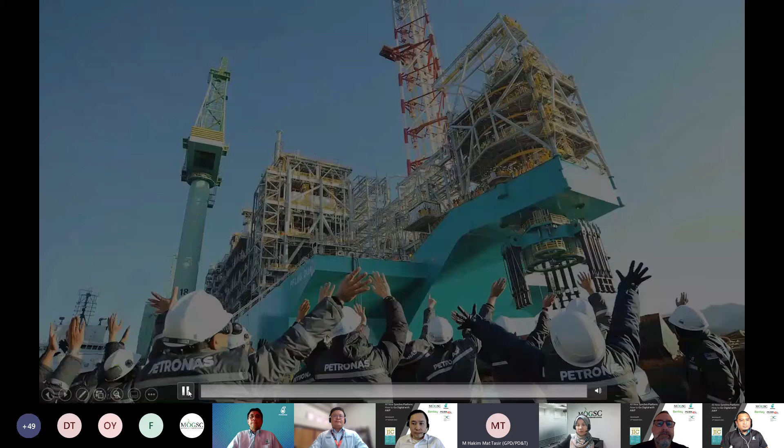WEF established the Shaping the Future of Construction project, about what the future of the industry will look like, and how best to prepare for it.

Current business models, strategies and capabilities of players in the infrastructure and urban development industry will not be sufficient for any of these future worlds. But there are 6 no-regret moves all infrastructure and urban development companies can take to prepare.

First, they must attract new talent and build up the required skills. Widening the sourcing of talent and improving the industry's image can help. The company should also provide more modern workplaces and opportunities for learning and development.

Second, infrastructure and urban development companies need to enable change management and adaptiveness. This requires agile working methods and flexible organizations.

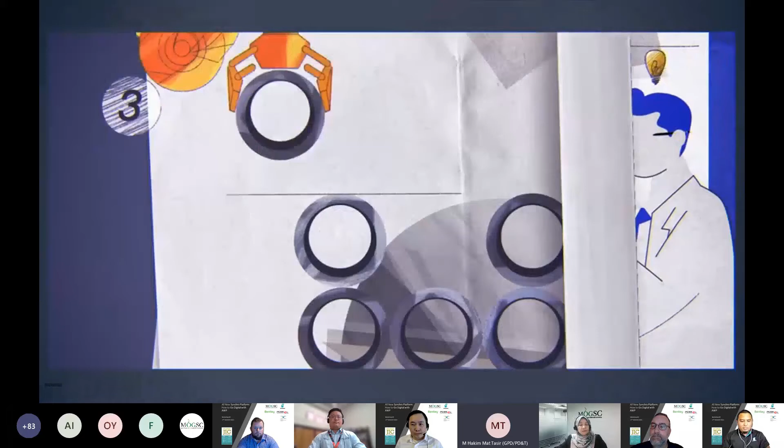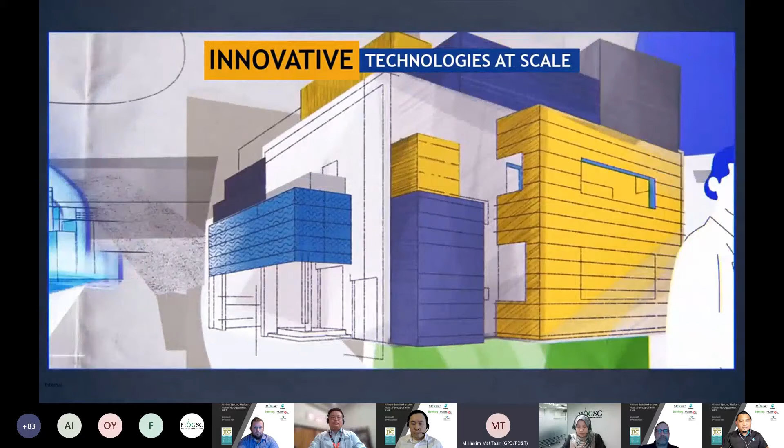Third, they need to implement digital models and data usage throughout their processes. Fourth, they must also adopt innovative technologies at scale. It's important to innovate in new ways and integrate new technologies.

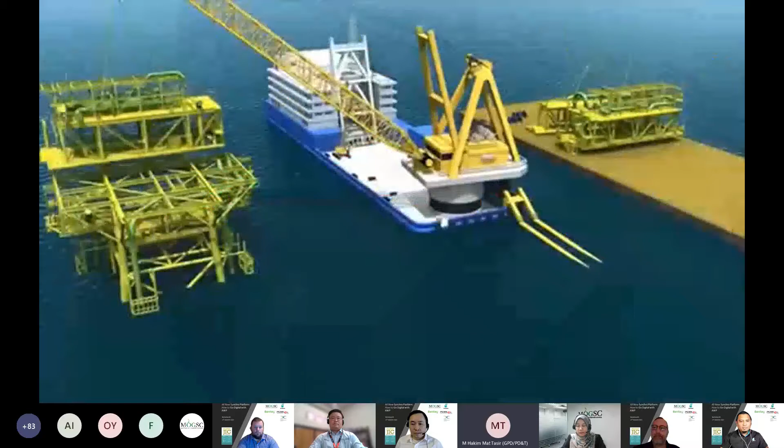Fifth, infrastructure and urban development companies need to increase integration and collaboration across the value chain. Sixth, companies must also constantly identify the most promising products and market segments while embracing new businesses. This is how construction is being done in other parts of the world.

Planning is everything. So what do we aspire the future to be for Malaysia's oil and gas industry? We need to learn from others and adopt the best.

Advanced Work Packaging forges team alignment early in the project life cycle. Engineering, procurement, construction, and completions representatives collaborate to determine the optimal project execution strategy at the front end of the project. In a traditional project, engineering is performed by system, procurement in bulk, and construction by area.

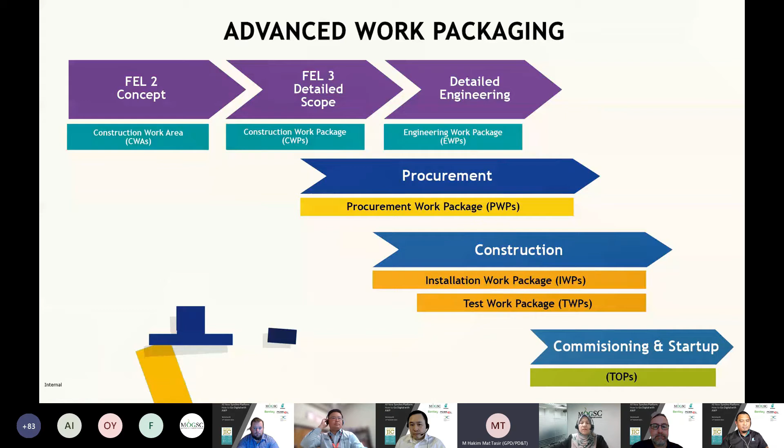AWP is designed to align engineering, procurement and fabrication with the path of construction, so that deliverables are managed and disseminated in the correct sequence to support the construction plan. Using Advanced Work Packaging, we won't find thousands of punch items at the end of the project.

Project Production Management. In project management, cost, time and cash are a function of trade-off between scope and quality, schedule, and the use of resources, also known as the iron triangle.

But in Project Production Management, cost, time and cash are a function of interrelationships between product design, process design, capacity, inventory, and variability. The main difference is PPM views the project as a production system, which applies operations science as the technical basis to map, model, analyze, optimize, control, and improve project production system performance.

This is the current scenario. The world is currently facing crisis, be it crude oil, the pandemic, as well as the economic downturn. We cannot be complacent based on what we have.

We must face the challenges that AWP will be able to offer Petronas, as a company and owner, a different opportunity to realize a positive increase in safety, production rate, and reduction in capital installed. On the contractor side, that will be able to increase profitability.

Operational science: in adopting PPM, the project team will be able to further look into the granular part of project production step by step.

In short, what I personally can say is AWP as well as PPM will be able to innovate on flexibility, ideas and solutions in the project lifecycle.

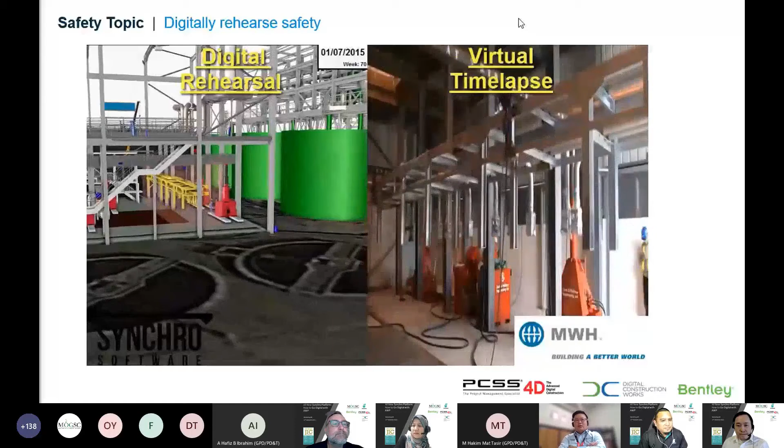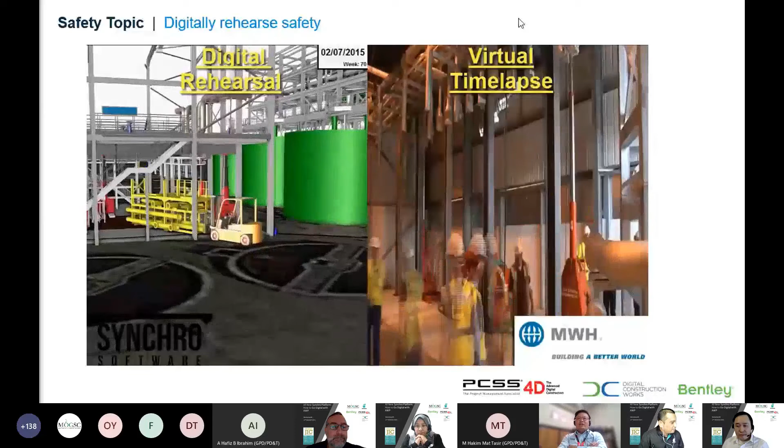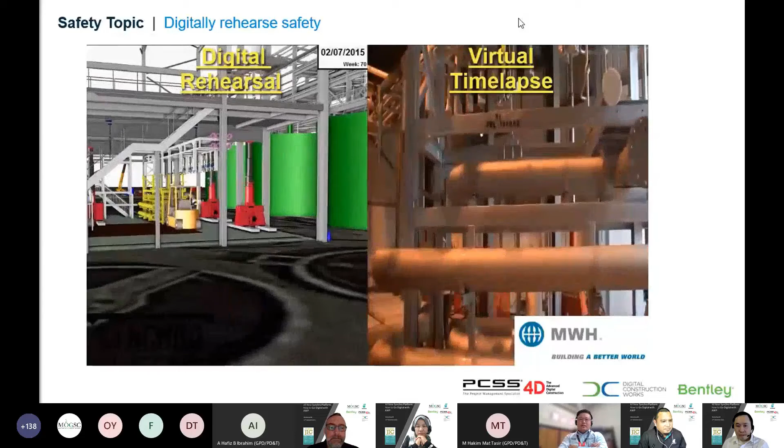But again, we can always enhance the way that we plan through a lot of factors that influence the execution of the project. So if you look at this digital video that we're having right now, try to imagine where we can use this digital information to do a rehearsal of our construction executions, not only as a platform for communication among the project team to understand how we're going to do it, but also to enhance from a safety point of view.

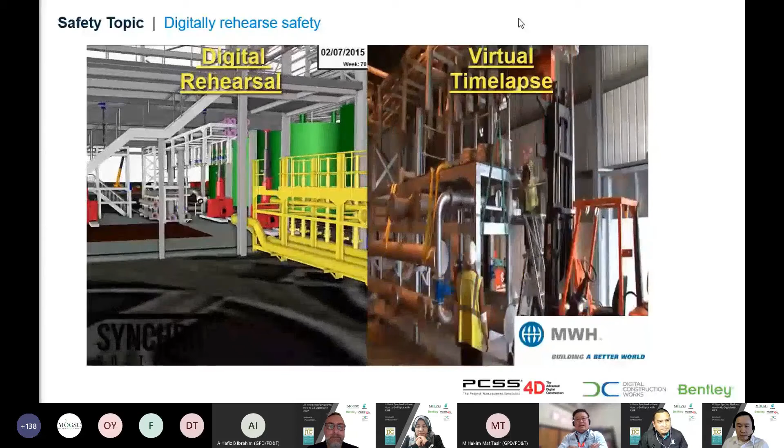Especially, we reuse this data for our toolbox meeting in the morning to say, hey guys, this is what we're going to do at the top side, E6, probably F23. We're going to skid in a pipe rack. So we visualize it, we learn it, we go through the process. I think the most important part is that we rehearse it and we optimize our project plan.

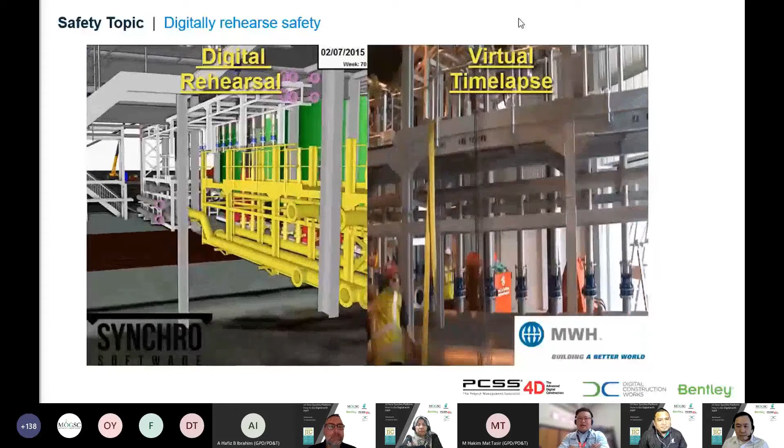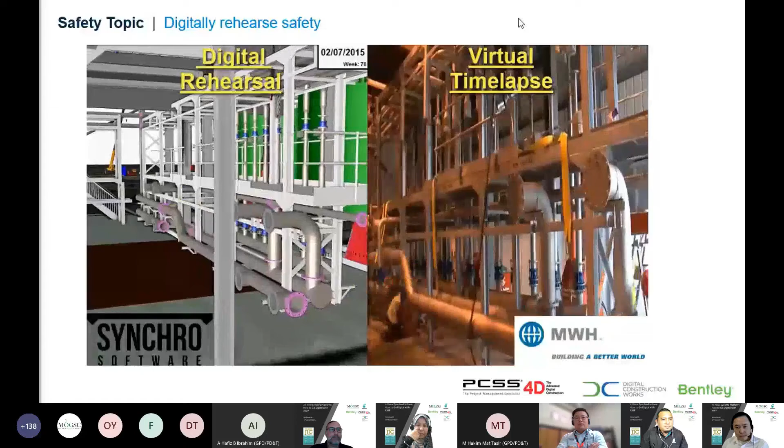At the current sessions we have in our project challenge session with our contractor, we need something more visible, something more constructive. So I think digital construction is the way to go to enhance our project delivery. This is where we start to know what we don't know, and now we know how we're going to do it down the road.

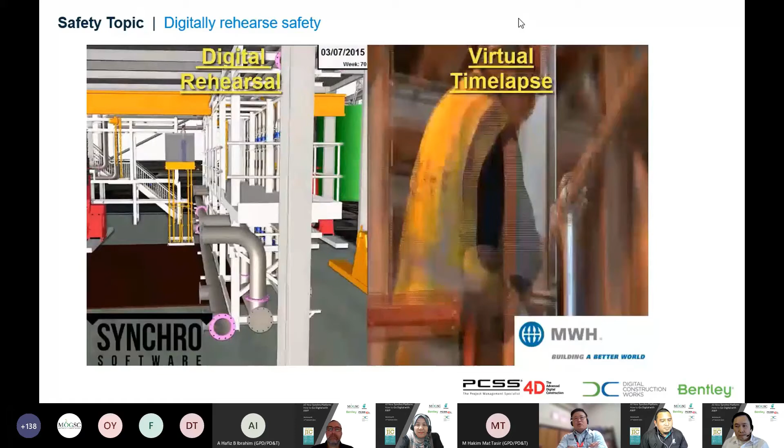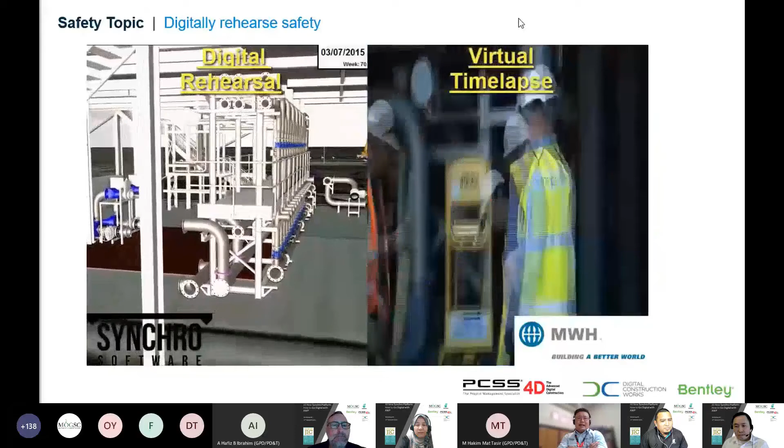So enjoy these sessions, part one is going to share a lot of enhancement that we have in the digital platform, how we optimize our usage. It's not only about the software itself, but how it's practical and how we practice it on the ground. I hope all the participants today are able to enjoy the session, and it gives you a light at the end of the tunnel to say, hey, this is something really cool, and it's going to enhance our project delivery teams.

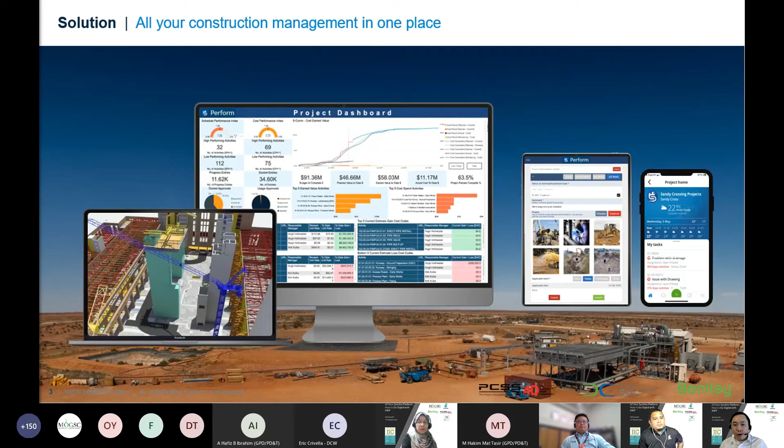Now let's spend a few minutes to understand the concept of connectivity within the solution. What fits into Synchro is on the left, and what comes out of Synchro is on the right side. The inputs in Synchro include your design model, your 3D design model, your documents, specifications, and schedules - it can be Oracle P6, Primavera P6, Safran, Asta, Microsoft Projects, Excel, and many different things.

If you'd like to use reality capture, which is basically your reality modeling mixed into your project, you can fit that into Synchro as well. Another thing people always forget is this side here - how do you capture real-time data? How you acquire it from the field using mobile devices, your laptop, tablet and phones, and how you would load them into Synchro and then consume the information almost in real time.

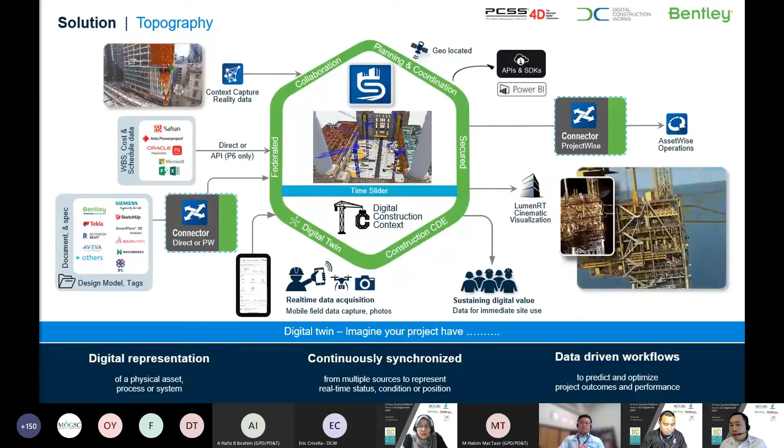Now, if you need to get access to the data, Synchro provides an API and a connector to Power BI so you can enhance your reporting.

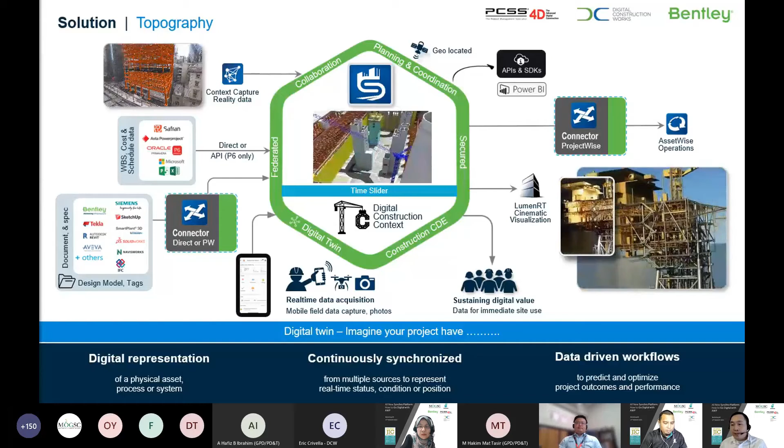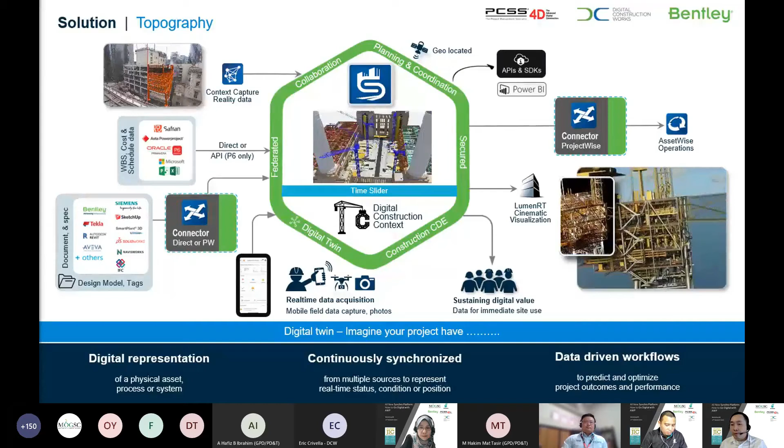You need to go to asset management. Synchro can feed into AssetWise, or you may want to create more visualization like cinematic rendering. We can connect to LumenRT from Bentley to produce a very cinematic way of visualization in your project.

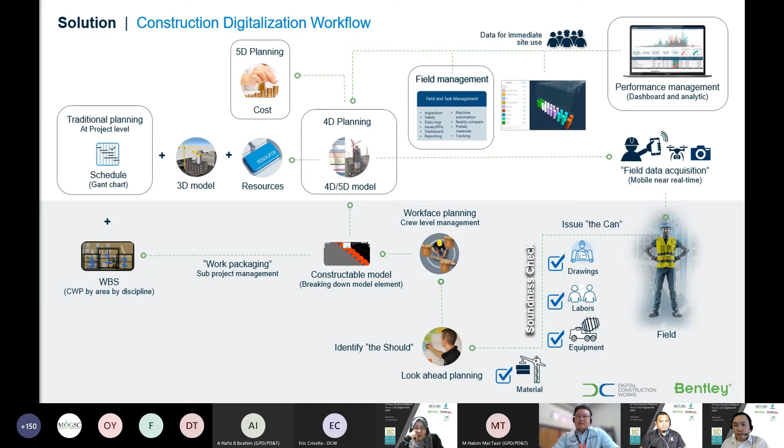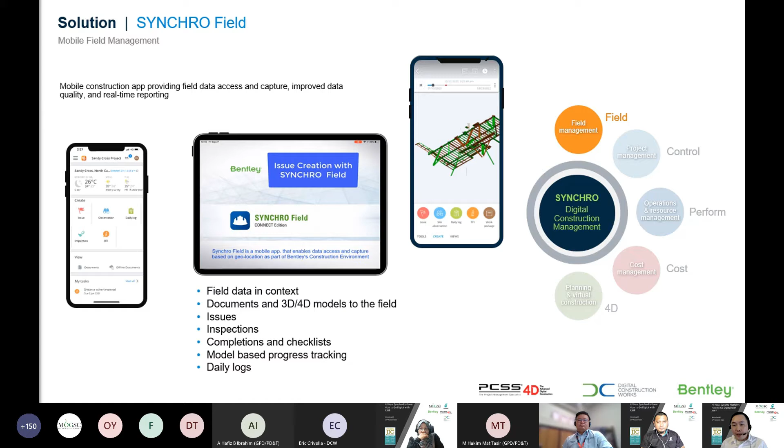So what is Synchro Field? Synchro Field is basically an application that you will install on your mobile device, a tablet or mobile phone. This allows you to access your documents and models in the field. You can document issues, inspect your work and completion, go through checklists, and perform progressing using your model, capturing your everyday reports into the application.

Synchro Field works in conjunction with Synchro Control. Synchro Control is basically the project management aspect of Synchro, giving you access for the administration of the project.

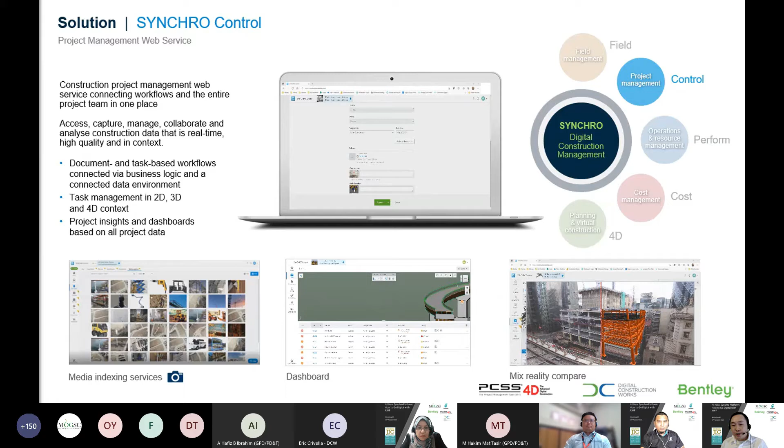You can also use several different features here, like media indexing that will manage the photos you take throughout the project. You have a dashboard view with a map showing where you are in the project. You can also view your mixed reality compare, accept and receive documents, and manage your documents and other things within Synchro Control.

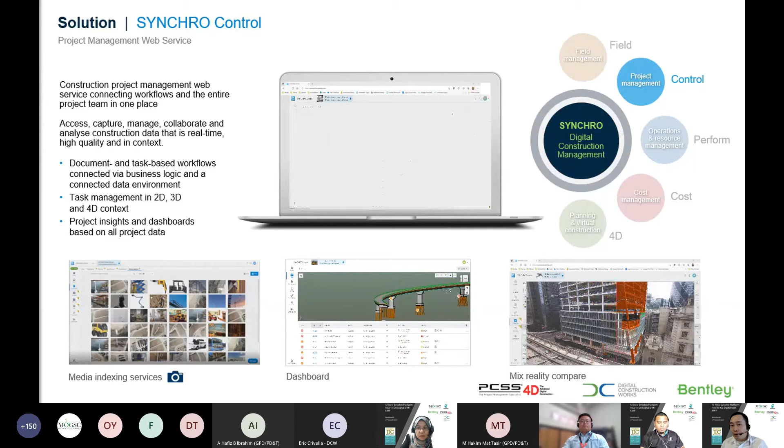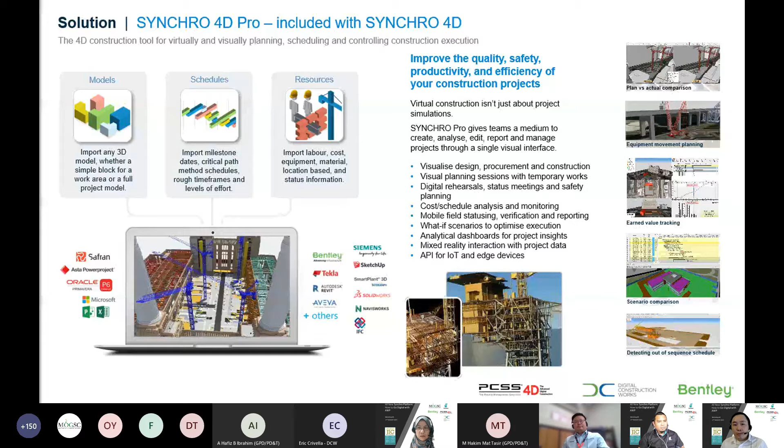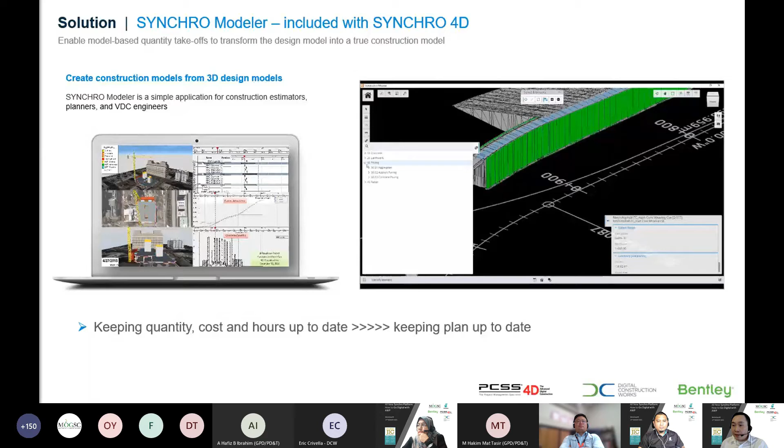We also have a neat feature that allows you to perform design change detection. When you walk into a project, you have to deal with design changes.

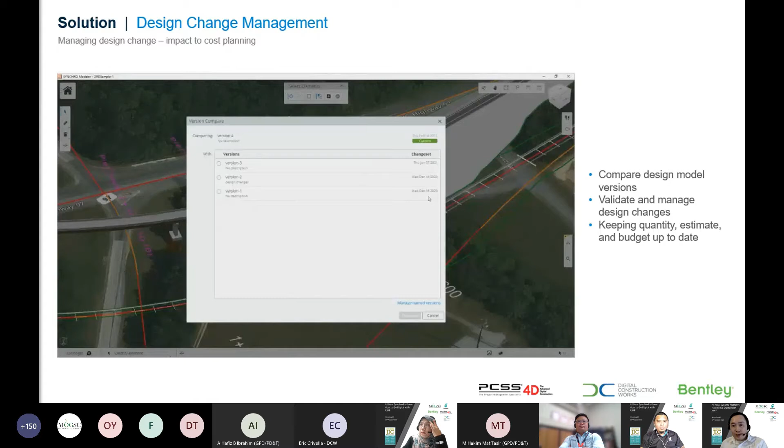Our software will automatically detect changes when you compare two revisions of your model. It will give you color-coded results: green, blue, and red. Green are new model elements added that didn't exist before. Blue are models that have changed, for example a foundation getting larger or smaller. Red is the model that was deleted.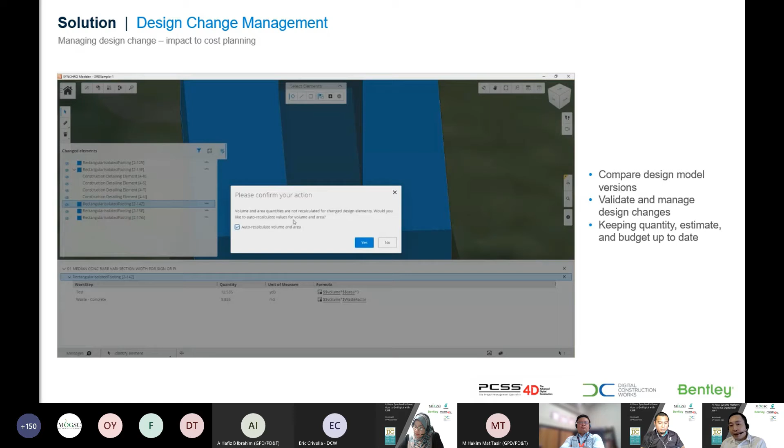So with this, you can easily detect which models affect your quantity base, which will in turn affect your schedule and your plan.

Now, Synchro Perform is basically a performance management solution within the Synchro Platform, allowing you to capture not just progress but also earned value, daily costing, production, event management, daily diaries, and photo management.

One of the neat features in Synchro Perform is the timesheet. If you have your own timesheet system, you can continue to use it. For example, if you don't have timesheets, you can see how you can build timesheets and manage both human and equipment resources within Synchro Perform.

Now we have a new addition to Synchro, a solution for bid and cost management, as shown here. This represents another expansion of how the workflow for bid and cost can be digitally transformed. In this example, you'll see the digitization of bid requests, management of potential vendors, communication and receipt of bid proposals, comparison of proposals, and finally vendor selection.

Aside from the bid module, Synchro also has the cost module, which allows you to propose the creation of a proposed change order.

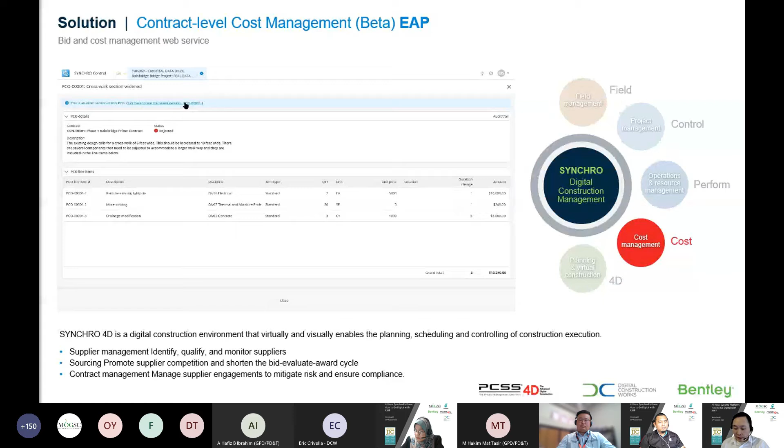All of this at the moment is still in beta, and if you guys are interested, we can include you in the early access program. As soon as we finish this beta and early access program, we can release this software for the general public.

Now let's touch a bit about the training and onboarding, how you learn Synchro, and how we support you with your Synchro adoption. We have a couple different avenues how you would learn Synchro, and all of those are free.

You can go to our electronic Synchro Learn server, where you can join online and learn Synchro using our learning system there. Or if you have LinkedIn Learning accounts, you can join our LinkedIn courses on Synchro. We launched for Synchro 4D, which is mostly the heavy lifting of the learning in Synchro. Control and field, and then modular will hopefully be in the second half of this year - we should be able to launch that.

If you want to test Synchro, you can also work with us and get the proof of concept going. We offer 30 days of proof of concept to make sure everything is good for you before you actually commit and adopt Synchro.

From onboarding and training, we have all of these communities, Synchro Social, tech support, all resources in one, and then we have DCW and local partner in Malaysia to do so. With this, I would allow Doug to actually go through his slide to talk about how you use Synchro in your AWP.

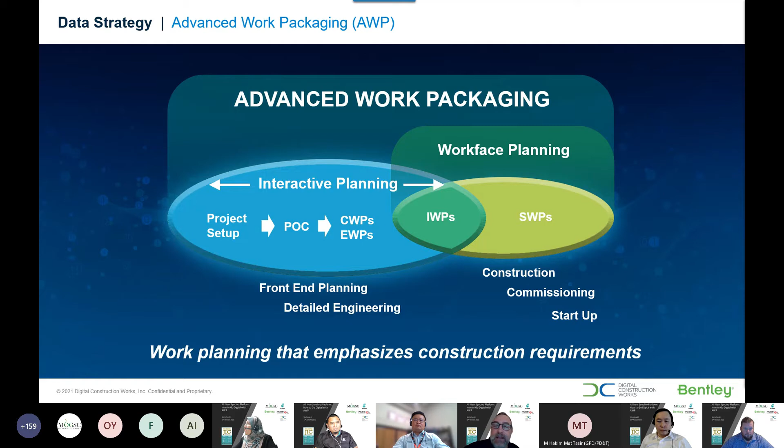At a high level, connecting the dots here in terms of having fit-for-purpose work packaging and constraint management. The thing with AWP is really having dedicated planners to do the interactive planning sessions using a virtual construction model and keeping that up to date, catering to field supervision - making their life easier and developing digital workflows that cater to them, allowing them to see what's coming up next. Do I have all the materials and can I execute that work? So doing the planning and the constraint analysis.

At a high level, if you're able to link together the BIM model and combine that with the AWP technology and work processes, and try to work in a collaborative environment, that is the optimum in terms of getting to digital project delivery. If you do this the right way, simultaneously, you can deliver a digital twin.

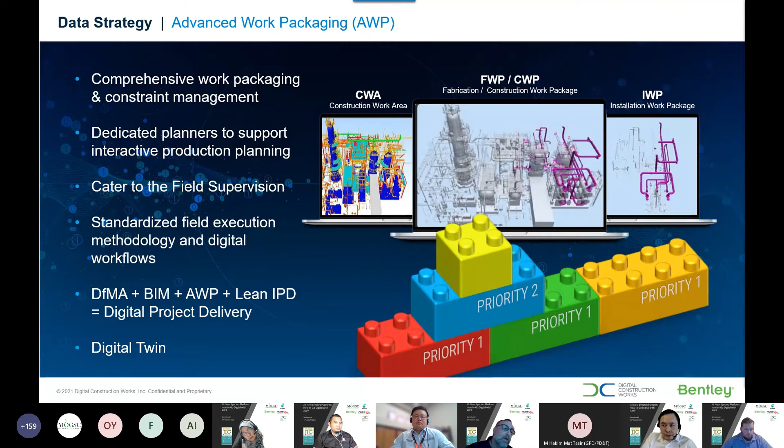At the end of the day, what you're trying to get to is a mission control that has a way for you to manage all that data, where you can see the plan versus the actual versus the as-is. Linking together all that data throughout the life cycle, looking at it from the data requirements and feeding that into the 4D, 5D model, the path of construction, breaking that into engineering work packages, then construction work packages, installation work packages, and the system, etc.

And managing that whole process of creating the work packages as well as the constraints, and looking at it in relation to the procurement aspects of it, as well as what materials have arrived on site from an integrated materials management perspective. And then as things are being done out in the field, taking advantage of field-based progressing and inspections and tying that back into the commissioning and managing those interface handoffs.

So at the end of the day, it's not just about the data, but getting the data and using your technology to help enforce your compliance towards the AWP process. And the more that you're able to get a virtual construction model and keep it up to date and keep the schedule and the models up to date, the greater visibility that you'll have.

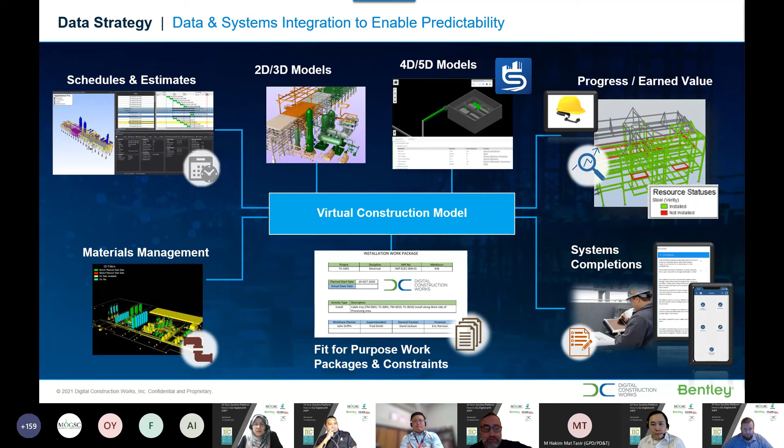At the end of the day, this is what, having an evergreen virtual construction model that's kept up to date, and everybody knows you walk in the morning meeting, okay, you're going to go walk down these 3 different areas. You're going to start up these particular work areas, and everybody has a better picture in terms of exactly where the project's at by keeping it up to date within the schedule and within the model. And that virtual construction model reflecting exactly who's doing what, when, where.

So if you do this right, you can drastically improve collaboration on your projects and productivity, and drive that in terms of onto your projects to the point where you can know exactly where you're going to be, not only the next day, the next week, but the next 3 weeks. A 3-week look ahead, right? So keeping that rolling look ahead going.

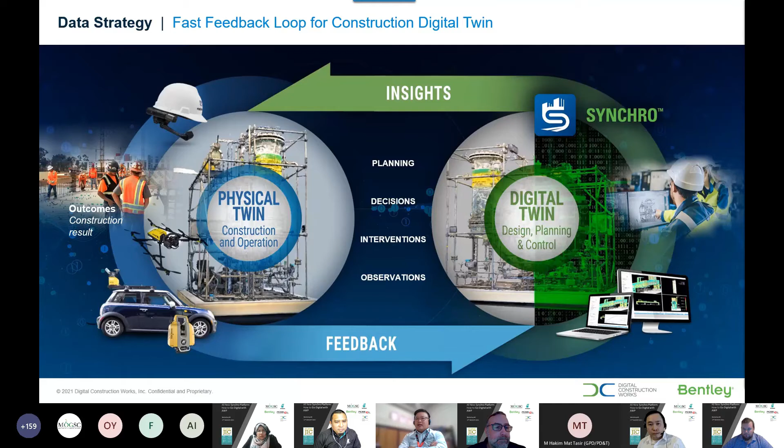So try to imagine that in our project sessions where we have what do you call that, challenge sessions between the main contractor and the clients. I think that picture basically just tells the whole execution plan in a crystal clear idea of how we're going to execute our works right now. I think that challenge session can be very beneficial in the execution plan.

So interactive planning is a key part of it. But if you get this right, basically you can use this process as a way to get the feedback from the field to make better decisions by keeping an evergreen virtual construction model.

So the idea is to collect the field-based progress out there in near real time and update that, bring that back to the model, plan versus actual versus as-is. If you get this right, you can create a construction digital twin that can feed a performance digital twin and really support the reliability and a continuous agile handover process.

So I won't spend a whole lot of time on digital twins. Let's let Doug go through and give some more of the specifics on the demonstration side of it.

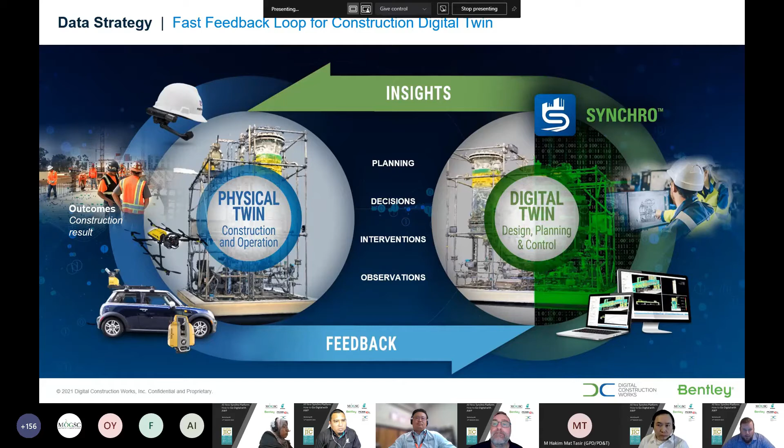Okay, thanks, Eric. All righty. So what I'm going to talk about today is more so the AWP process with Synchro. So currently I'm leading an implementation on a $10 billion LNG facility over here in the US, specifically with Synchro. And so I'll be relating some of the different things I share today to some of the projects that are going on over here.

So the typical work process for AWP is developing and reviewing the path of construction, building your CWP or construction work package and engineering work package boundaries, creating installation work packages, clearing constraints, approving the IWP through some sort of IWP release plan, executing the IWP through job cards, and once it's in the field, collecting progress until you're able to close out that IWP.

So let's begin with the path of construction. The primary deliverables from a path of construction are the identification of major construction constraints such as weather, equipment access, resource availability, and the sequencing of construction work areas that may be used to make a level 2 schedule.

Now, it's very important to understand that developing and reviewing your path of construction can occur very early on in a project. So if we have only at this point a 2D sketch or 2D plot plan of the overall project site, you can still visualize your path of construction through extruded shapes and 3D objects prior to getting into detailed design and engineering.

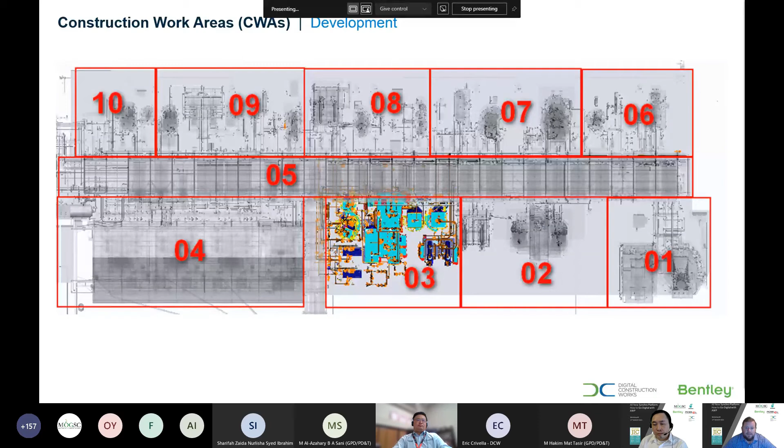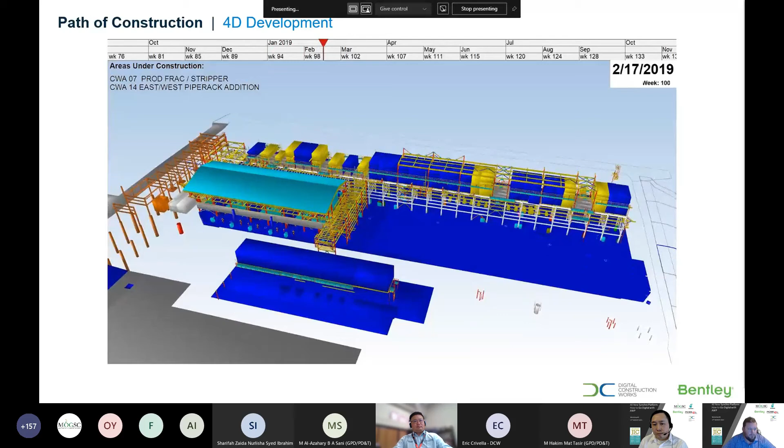So it's the better the data, the better. But if it's not there, we can still move forward with it. And I'm sure everybody's seen path of construction before. What we're doing is we're trying to optimize the sequence of work for the overall project at the CWA level, if possible the CWP level, to see where we're at.

And when we're developing our path of construction, we may not always have it developed in the most efficient way. So with Synchro 4D, you're able to do what we like to call optioneering, where you can have multiple iterations of the path of construction and look at them side by side with the same schedule to see which path of construction is the most efficient, most productive for the project. You can do this, many iterations over and over, until you get that optimized path of construction, that optimized sequence of work, to enable the most productive execution in the field.

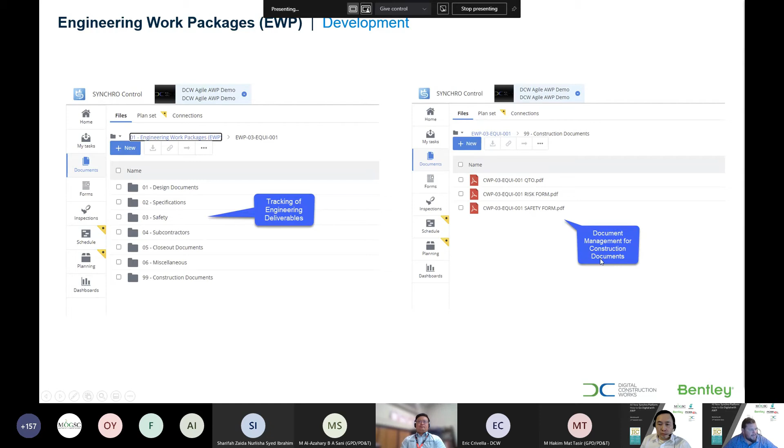So the next step of the AWP workflow is setting your engineering work package boundaries and your construction work package boundaries. Now, with Synchro and Synchro Control, to be exact, we're able to build EWPs, or engineering work packages, where we can upload all of our safety documentation, vendor documentation, engineering drawings, construction documents, all into a project repository that's built into the web application. As we continue, I'll show you how this relates to short-range production planning and IWP creation. So that is creating EWPs within Synchro.

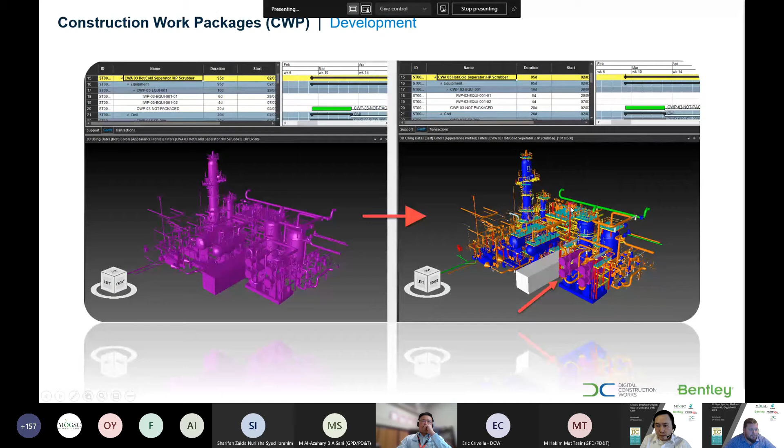The next step is building your construction work packages, a CWA or construction work area to CWP breakdown. CWAs are multidisciplinary, a general geolocated area, whereas CWP is a smaller breakdown, more discipline specific. So every CWP is discipline specific, and CWPs are really the backbone of the construction project. They're the foundation from which all construction activities are executed. They facilitate early construction planning and logistics decision making, and these CWPs will be used to build out the IWPs, or the weekly work fronts, within the AWP process.

So once we have our CWPs and EWPs created in Synchro Control and Synchro 4D, we can then build and extract our IWPs and link them with the checklist items in Synchro 4D and Control. So we talked about the CWA to CWP breakdown. The CWP to IWP, or installation work package breakdown, is just building out that discipline-specific weekly work front for the construction crew, breaking it down from project to sub-project to even further sub-project.

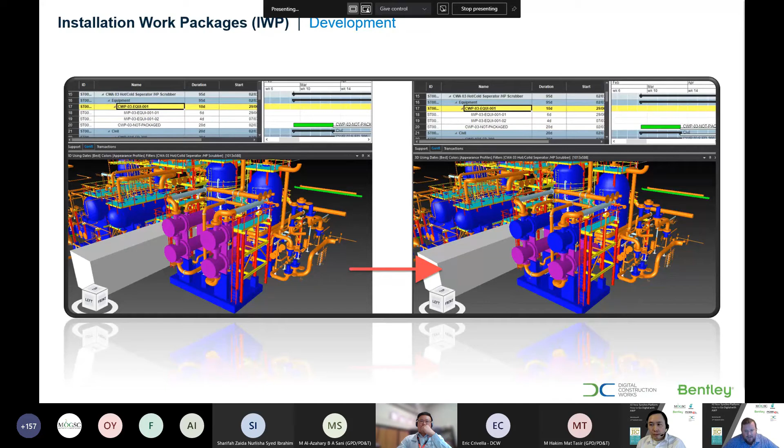Now, how we build packages in Synchro Pro, I'm going to go ahead and share this video.

So you can simply focus on your CWP and individually select components, build what's called resource groups within Synchro to quickly navigate and show your different work packages, and you can add them, tag them to your P6 schedule, your Microsoft Project schedule, your Synchro schedule, whichever schedule you're using on the project. You can also use a mixture of various schedules. Then as you're building out these work packages with the individual components, you can sequence them out, which we'll cover here in a couple slides for IWP sequencing.

It's important that the planners at this point in time are creating proper groupings of components that make sense for the field, and make sense in regards to the install itself. At this point, we're not looking at any constraints. We're simply building packages. We'll go through constraint management in the next couple slides. But that's how you actually build the work packages in 4D.

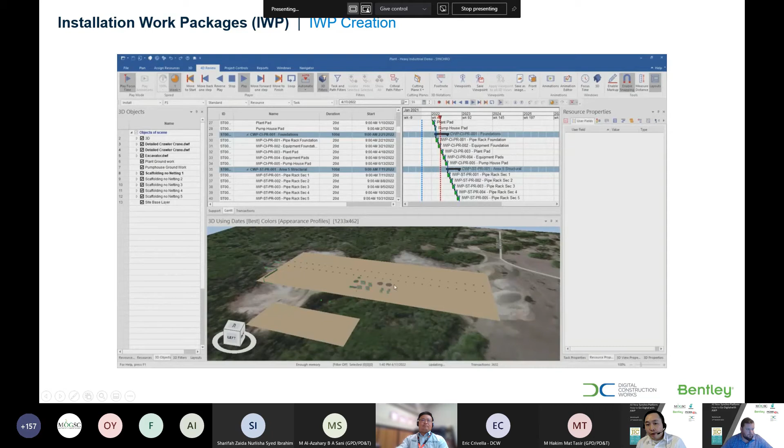Doug, may I interject real quick? Yep. So the benefit in using Synchro 4D to do this, Synchro 4D has a CPM engine in the background, so you don't have to leave the application when you create a logic connection between IWP 1 to 2. You can do it all here, and then in the background, you can actually sync this back into your P6 through the API. So everything is going to be very orchestrated. These are really the benefits. So many different applications you have to leave just to put logic, maybe not allowed, right? You have to go back to P6, come back again and rebuild your package. That's way time consuming. So this is an all-in-one tool that you can actually build packages from in Synchro. Back to you, Doug. Yep, thanks.

So as we're building out our packages, we need to do quantity takeoffs. For each individual package, we need to know what material we need for that specific work package, before we can in turn clear the constraints, the material readiness for those.

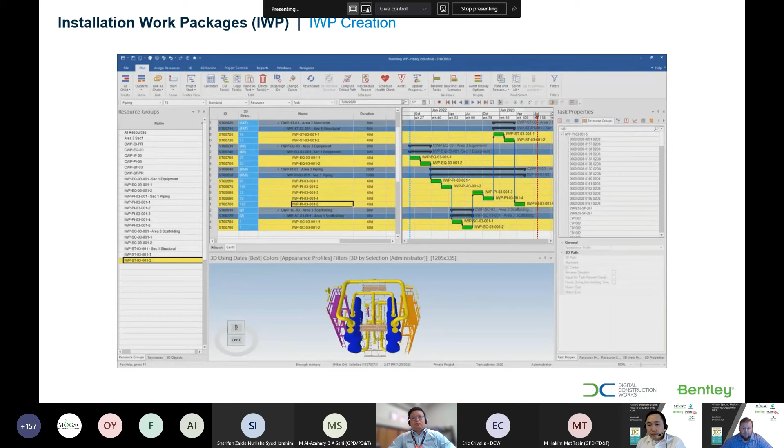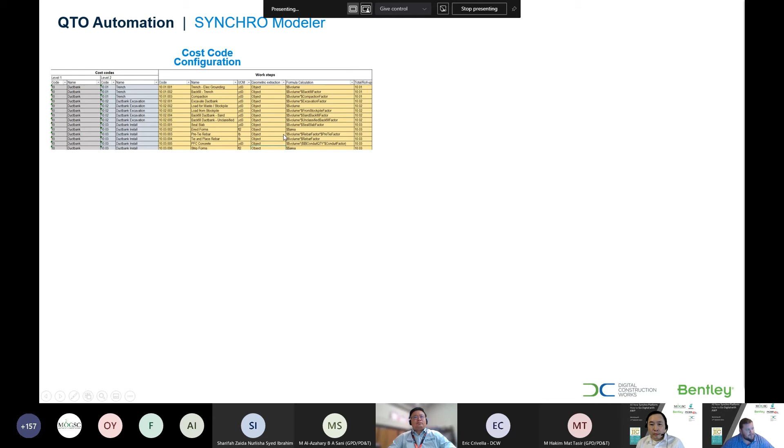So with Synchro Modeler, which comes with 4D, what we're able to do is configure project or portfolio specific cost codes, which can be used on multiple projects once you build the first configuration. These are some examples of duct bank cost codes that were built in Synchro Modeler. We can upload those configurations to Synchro Control, and then within Synchro Modeler, we're able to assign cost codes to 3D objects.

We're also able to split those. Engineering models don't always come constructible, right? I'm sure everyone's seen it. Let's say duct bank, for example - you could have a long stretch of duct bank. It's not going to, all the conduit doesn't come in 100-foot sections. It's going to come in smaller sections. So we're able to split those non-constructible components into constructible 3D objects or a construction model.

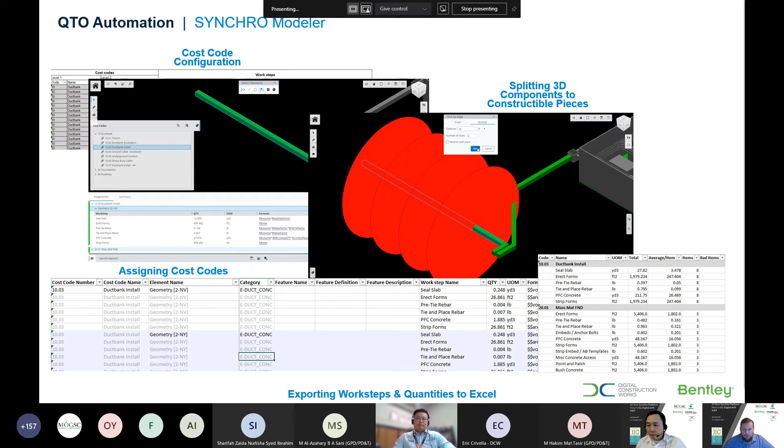And then we can spit out an Excel summary of all our quantities. One thing to note is you can either do this by selecting objects one by one, but of course that takes a long time. So what we're able to do is also assign cost codes based on querying various attributes. This again refers back to what I stated earlier with path to construction - the better the data we have, the smoother the AWP workflow goes.

As we're packaging this work, we can quickly status the 4D model to get a visual sense of what's packaged and what's not packaged at this point in time. So you can quickly see, okay, area CWA 1 is 50% packaged and ready for the field, whereas CWA 2 is 20%. So you can quickly get an idea of where we stand from a short range production planning perspective by color coding the model.

Along with that, similarly, we can color code the 4D model for subcontractor coordination. So if there's various subcontractors performing various pieces of work - electrical subcontractor 1 and electrical subcontractor 2 versus mechanical subcontractor - as we're building these packages and adding that subcontractor to the work package, we can status the model and color code it based on which subcontractors are working on which work. From an interactive planning perspective, if there's an issue that needs to be addressed, you can quickly identify who's actually executing that work in the field or who plans to. So that's building work packages within Synchro 4D and Synchro Modeler for quantity takeoff automation.

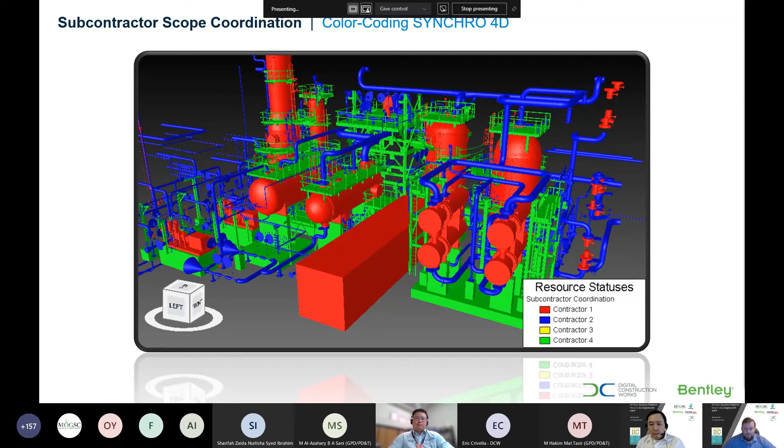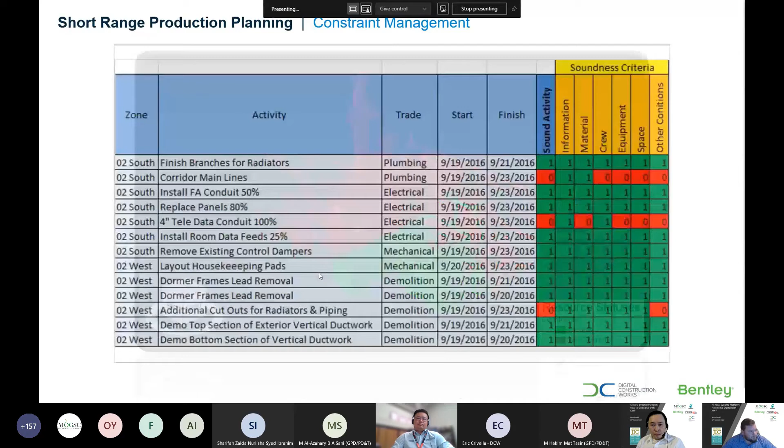So the next step obviously would be, we're building these work packages, we've got to make sure that we can clear all constraints before we can issue the work to the field. Now within Synchro Pro, there's a good way of doing this.

What you're seeing up here are user fields associated with individual tasks or installation work packages. We have material constraints, crew constraints, equipment constraints, and you can see a number 1 going across all of these user fields. So what we're doing is creating a calculated user field to show whether a package is constraint-free or not.

Sound activities are marked as 1, meaning they're constraint-free. Unsound activities would be marked as 0 individually. So if we had a material constraint that wasn't cleared, it would show as 0 here, and we do them individually.

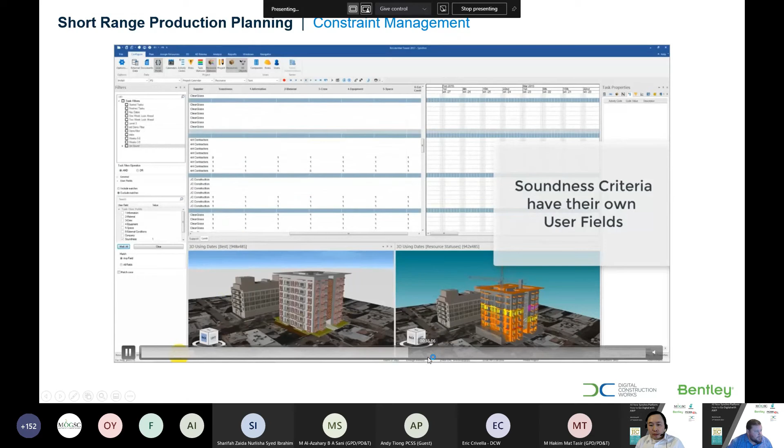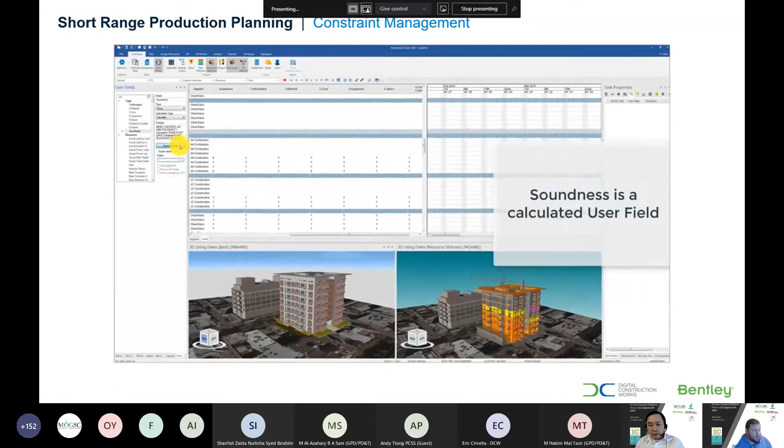Using a calculated user field, which I'm going to fast forward to, we can generate a soundness report showing whether each individual work package is constraint-free or not. This is the script used for that. Essentially, you select all the work packages you want to check, hit recalculate user field, and it gives you an automated calculation of whether they're constraint-free.

Based on that calculated user field, we can apply conditional formatting to the schedule to show which work packages are constraint-free and which still have constraints, and reflect that same formatting in the 4D model, so you can quickly see which work is constraint-free and which is not.

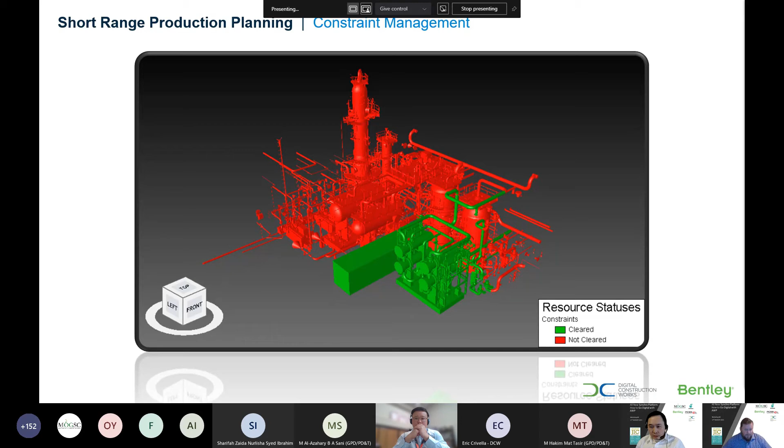Now, this is a fit-for-purpose, short-range production plan and constraint management approach. But there will be times on a project where we need more detail than just saying we have drawing constraints or material constraints. There will be critical constraints where someone needs to quickly resolve an issue.

So in Synchro Control, I can create a constraint form and assign it to someone. They would get an email saying we need them to look at this constraint for this material and work package, due next Tuesday. We can assign critical constraints and track them at a detailed level, all linked to a work package, giving us a full audit trail of constraint management.

You can build your own custom constraint forms and other forms within Synchro Control, which can also be filled out on iPads in Synchro Field.

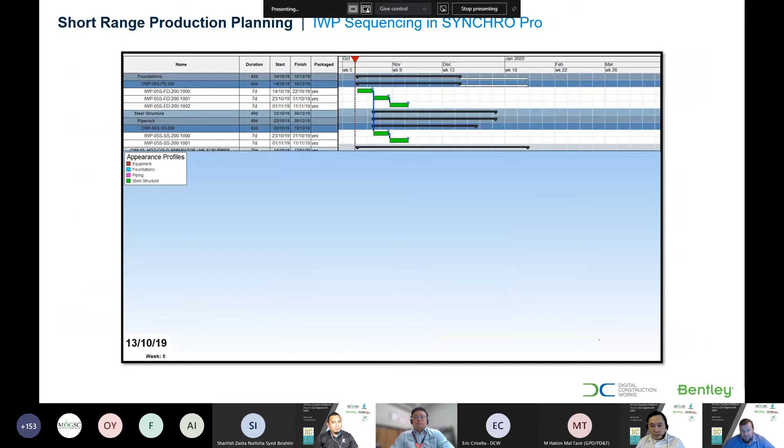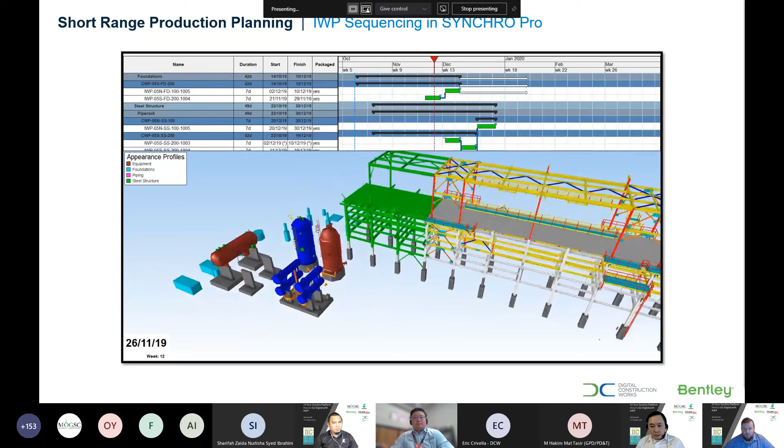Once our constraints are cleared, we can build that IWP schedule logic in Synchro very quickly and push it back to P6 if we're using P6 as our master scheduling software. Again, we don't need it — you can use Synchro alone for scheduling, since it's built off of the same methodology.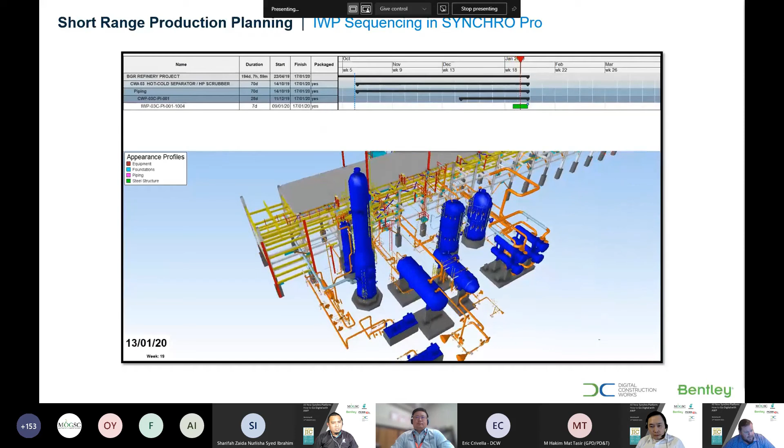But from there we can really get a picture of our short-range production plan — the 3-week look ahead, what work is occurring, and dealing with different crews.

I know we're getting close on time, so I'll go quickly through this slide. As we build out our packages, sequence the work, and do our look aheads, we're also able to do 3-week look ahead safety planning using Synchro, where we can see what work is being executed, what safety hazards are present, and what we need to mitigate.

We can also bring in reality capture to Synchro — this is a good example of that.

Down here on the right is probably one of my favorites, and something I see on projects all the time: in the lunch tents, they have the 3-week look ahead playing on a loop on the TVs, so craft can watch it while eating lunch and see the work they're going to be executing over the next 3 weeks.

Once we've packaged up everything, we have to send it out to the field. Within Synchro, you can have a customized IWP release plan or workflow, built at a portfolio or project level, controlling how the work package goes out into the field — it's completely customizable.

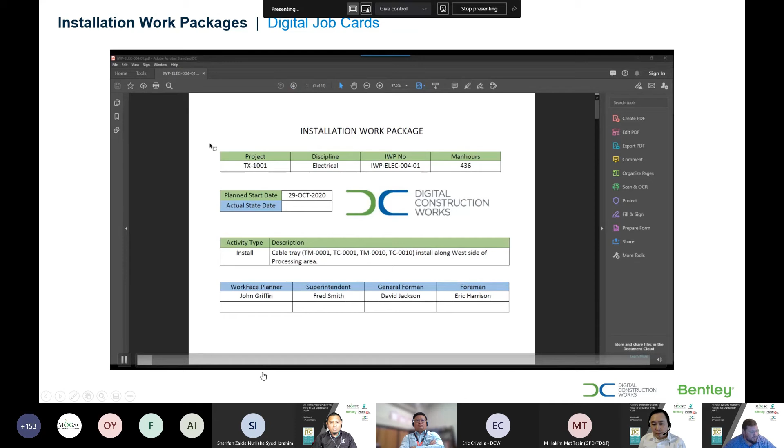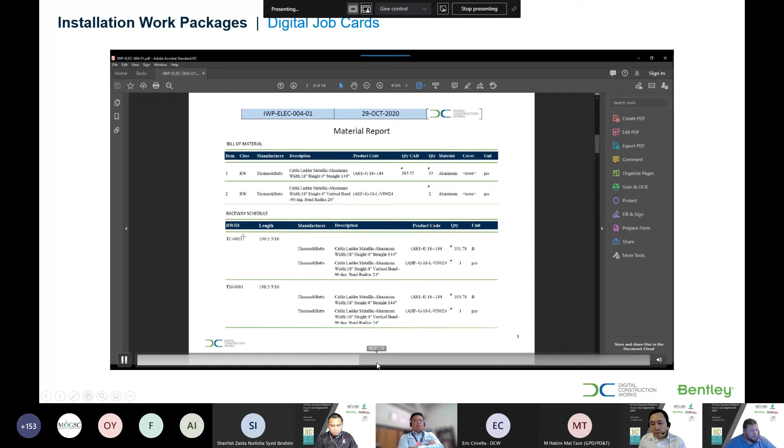In the end, when we send them out to the field, we end up with a work package similar to this, with a title sheet, your different constraints that are cleared, the dates they were cleared, automated quantity takeoffs, model shots, and all of that. So this is just an example of a digital work package.

So once they actually go out into the field, that's the planning perspective. Now it's the biggest part, the construction perspective. Using Synchro Control and Synchro Field in particular, we're able to get all of our project documentation on an iPad, through the mobile app.

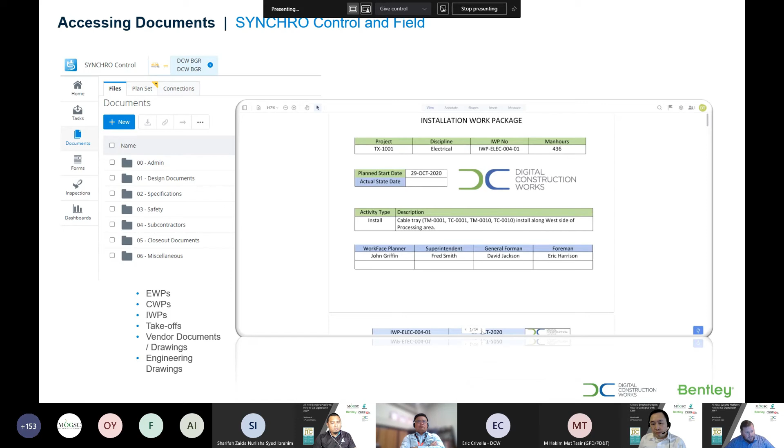Just like in Synchro Control, we were linking our construction documents to engineering work packages. Through Synchro Field, you're also able to navigate to that repository structure and open your various construction documents, whether it be the work package or safety forms, anything you really need.

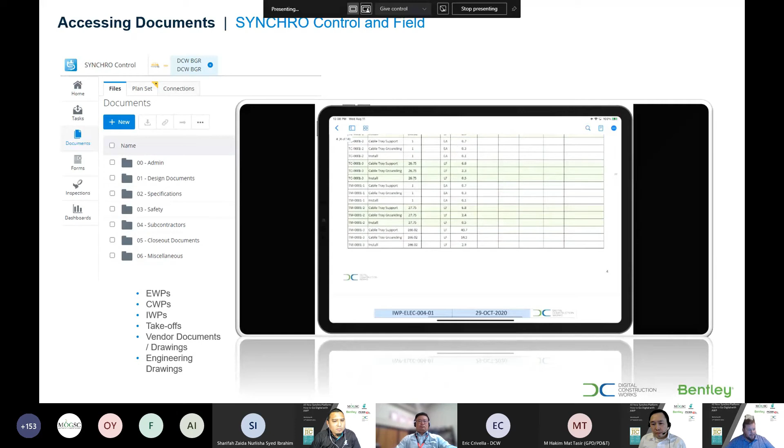On top of that, you're also able to mark up your PDFs, sign your PDFs. You can do all that. There's various options to annotate, mark up, sign, date, all of that, through Synchro Field on the iPad. That's for accessing documents.

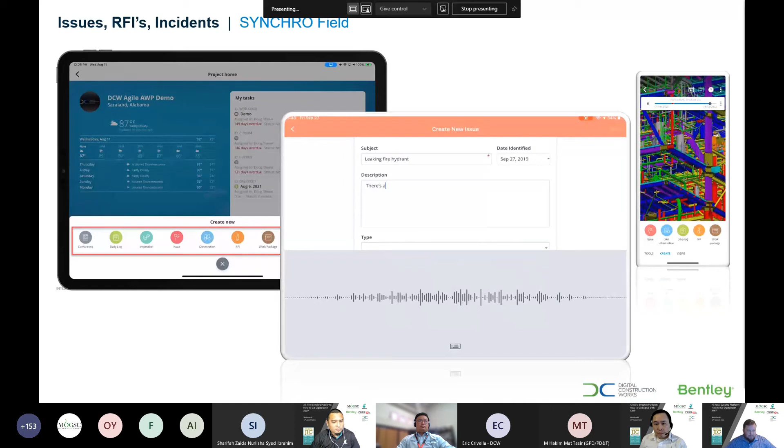Of course, it's construction. Issues occur, RFIs occur, and Synchro Field makes that super easy. There's basic forms that you can quickly create, whether you're connected to Wi-Fi or not. There's different forms within Synchro Field by default, and you can customize them, where you can put in the different descriptions of your different issues, RFIs, or incidents.

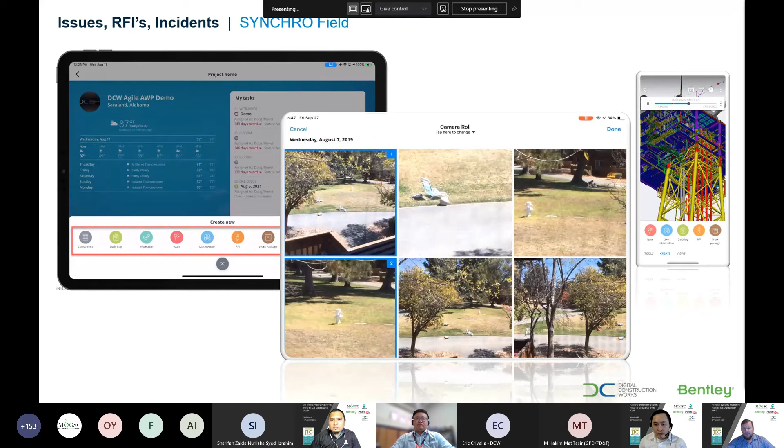You can tag pictures from your iPad. You can tag the location to the GPS, as well as the 4D model, which can then be reviewed and closed out later on in the office.

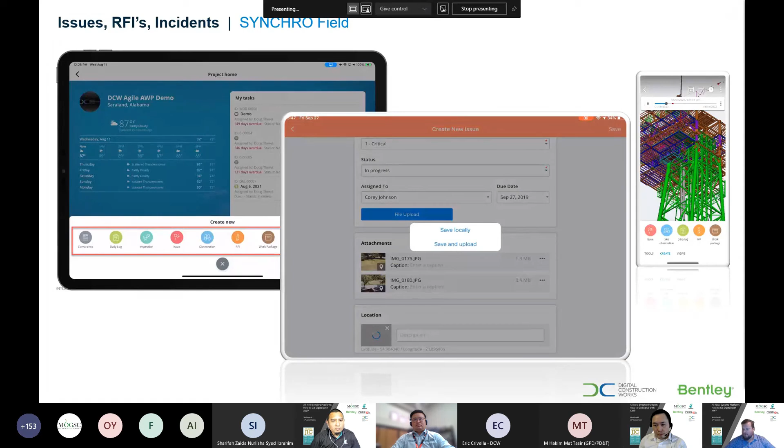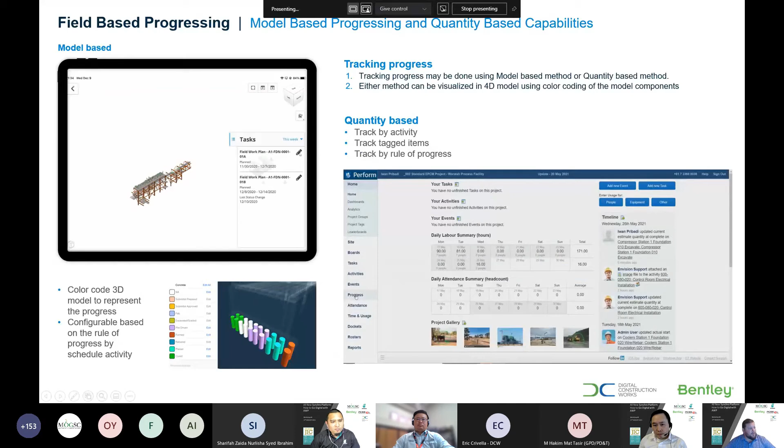From a progressing perspective, there's two ways to progress in Synchro: Synchro Perform and Synchro Field. The difference between the two is, Synchro Field is model-based progressing, where users navigate to their 4D model through Synchro Field, go through their different tasks, and at the click of a button they can select components and update the work steps that are currently completed.

Whereas in Synchro Perform, it's quantity based. This is where, for tracking earned value and all that, you can go in on a daily basis and say, okay, I'm at 20% complete, and then tomorrow I'm at 25% complete, day by day on the iPad in Synchro Perform, to get to the point where you're calculating your earned value and your PFs. Both are very easy to use and efficient.

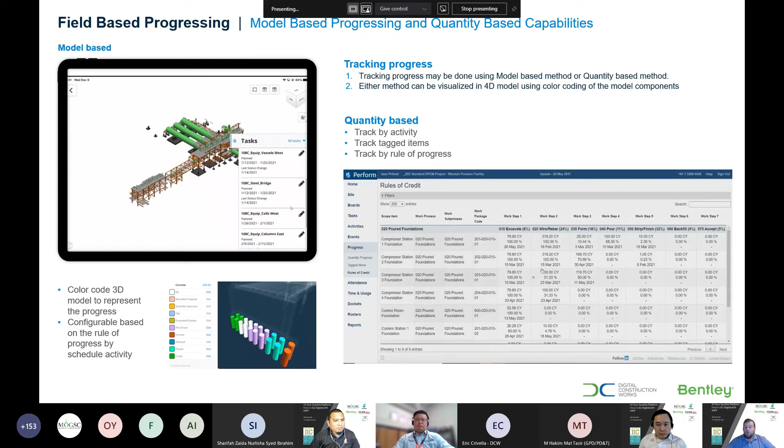And then as we're going through work execution, there's always events that occur. Being in Texas, we have hurricanes here all the time in the summer, so there's thunderstorms and lightning, and work gets affected in the field due to weather or other conditions.

Within Synchro, you can create events and charge it to a specific cost code, saying, hey, we were not able to perform work during these hours on this day because of a lightning delay. You can add a description for that, pictures, all that.

You could also do that if you were working in a muddy area and couldn't access the site, or had environmental issues. There are different ways that you can create events and then choose your pictures from your iPad, or take pictures directly through Synchro Platform, in order to upload that to the overall project site.

Lastly, inspections. Custom inspections can be created via Synchro Field forms, where your QA, QC and inspectors can go out to the field on their iPads, go through their checklist, update, tag stuff to the model, tag stuff to the map, and upload pictures.

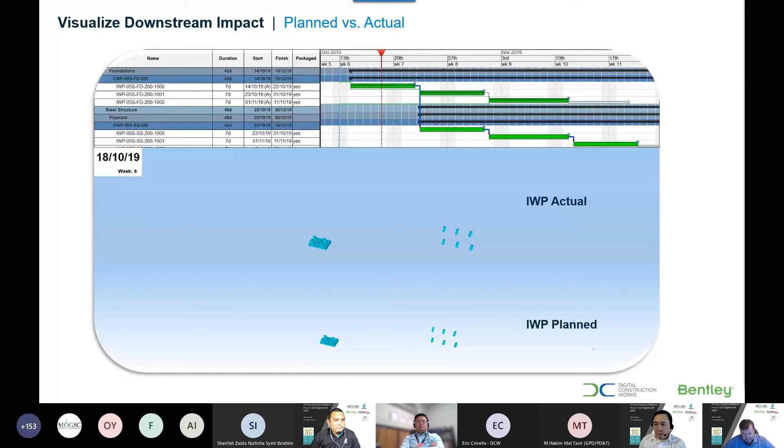Bringing all that back to Synchro 4D to do your plan versus actual scenarios, in turn that allows you to color code your models based on those KPIs and really get a clear indication of where we stand, how we're doing on certain disciplines. So it's all about the data, it's all about the workflows, and Synchro allows for that process to occur, through your computer and iPad.

Everything's linked, and I'm telling you, it's seamless. It's a very strong software, and I've really enjoyed working on implementations with it.

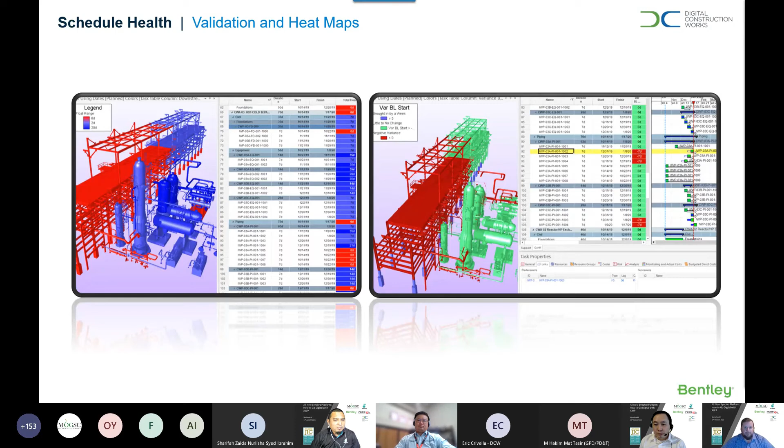Doug's shown you a good overview of how AWP can be applied using Synchro. Big picture wise, programmatic AWP is a journey. You've got to pick your integration platform, build your team, and get on with it. It's not a single project, it'll happen over multiple projects. But what we do know is that the more collaboration, the more integration, the greater we can drive predictability on projects. It takes a disciplined, agile, and continuous improvement type of process. Both Bentley, DCW, and PCSS are here to help you integrate, automate, and orchestrate your processes and workflows.

And with that, we should open it up to questions.